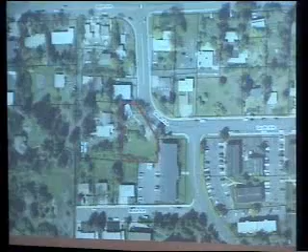So just to refresh your memory, this is the property. It's about 16,500 square feet in size at the intersection of Taylor and Lauder up here in the north portion of the screen, and this is where Lauder heads due south and then makes a due east direction change. This is the property outlined in red at the center of your screen. Within the R4 zone, which is multifamily residential, this was the division that was approved, taking that 16,500 square foot parcel and dividing it into 3 parcels of similar size.

This was the record of survey that was submitted, so we have the 3 properties, and then you have a shared access easement across parcel B, and this is where the single approach was intended to be created, off of parcel B, shared by parcel A and parcel C. This is what the applicant is currently proposing, a reconsideration to allow more of an ingress and an egress approach. I think the concern from the Public Works Department previously when this lot division was approved was under the current zoning code, we allow 1 approach per parcel.

So if we were to not restrict it to 1 approach with this lot division, then you could essentially end up with 3 approaches of similar spacing, grouped together along this Lauder Avenue curve. That was really the concern. With this configuration, you'd be maintaining the 1 approach here in the center, but incorporating an ingress approach further to the north on Lauder. So it would utilize more of an ingress egress where they would enter the property via the northern approach and then exit via the southern approach.

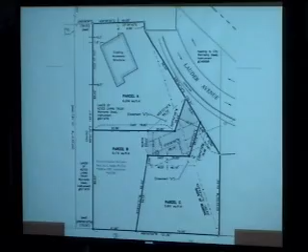Well, I could definitely see the issue of only one vehicular access if that was the only way in and out. But the only reason I'm showing up today is because I thought I was informed by Public Works, again 2 years ago, and I could be totally mistaken, that there was another way in at those parcels. I do know that I guess they are sort of locked in.

I don't remember it. Yeah, I don't remember that either. It would seem like the property owner to the north side of Boyd would have to grant access to parcel C in order for that to be an access.

Yeah, and I drove by there the last couple of days to double check that. Also, I wanted to check out where Deacon Extension is, whether that provides access to the parcel, but it looks like it doesn't because the red-lined area is still quite a ways from where Deacon Extension is. Do you know what I'm talking about by Deacon? Yeah, there's an alley there, here it is.

We have an alley labeled as Deacon Avenue Extension, but it's actually a private drive. There's a few parcels that end up utilizing their access off of that private drive, but they have no rights to it for this parcel here. It would just be for the benefit of this parcel as well as these parcels, and they'd really need to go through a court process to determine who actually has the right to utilize that, since it's a private drive not tied to any one of those properties.

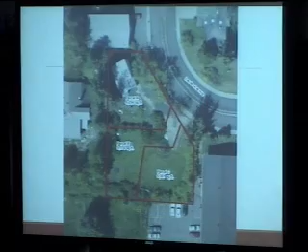Take a look at the overview again, you'll see where that building is, and you can see a tip of where the cars are parked. They pull right in off of... do you know which building I'm talking about? This one? That's exactly it. They have a slight driveway where cars can pull in and perhaps even turn around.

Right now, cars are mostly, or at least 2-3 cars, are parked by pulling in and then having to back out. I noticed in your staff report that the concern is over cars pulling in and then having to back out. So whatever you do, I'd like to point out the safety issues are very real for all of us who live in that area and drive, particularly in wintertime.

Thank you for that. Thank you.

Question for Mike, if I may. Mike, what is the current access for parcel A, the house that's on it? There isn't currently an approach off of Lauder. The current access would probably be from this property here, since it currently, I believe, is in common ownership.

But the intent of the lot division here was to be able to sell off portions of this property and this property here. I believe the current access—this was originally used as an accessory building, Mr. Kais' shop building I believe, and over time he wanted to convert it into a house. Obviously you need a separate access for a house if it's not going to be tied with this main property. So as this evolves and the arrangement has changed to have this be a house, that's what's pretty much necessitating the approach off of Lauder.

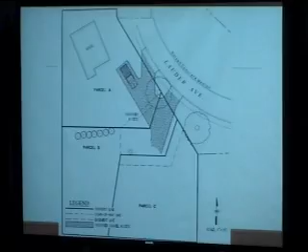We looked at this secondary access for two reasons. One, for safety, so nobody is backing onto the street. The access will most likely be used only for parcel A. That is not what was explained by Mike a moment ago. But there may be an easement developed for ingress and egress, since parcel A was making it very difficult to access that parcel. But like any access that's close together like that, it would most likely be used for a couple.

Mr. Chairman, if we're to the point, I would be in favor of doing it. I would propose that there be an easement that allows all three parcels to utilize both driveways, and that at the owner's expense, do not enter signs be erected on the property side of the north cut, and that a one-way sign be erected at the exit of the south cut. I'm guessing these could end up being rental units turning over every year with new students, and I don't think they're going to hold an orientation meeting explaining how to use the driveways. So to at least give them some hint of what to do when they pull out of there, a one-way sign on the egress and a do not enter sign for the ingress.

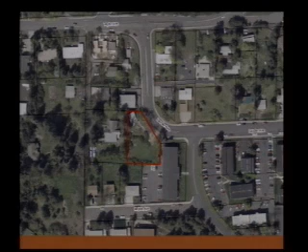The reason for using this curved kind of driveway is that getting into parcel A from the second access to the south would be difficult to turn and get back in. That's why I proposed doing the curved driveway. Like I say, ingress and egress from B and C from the original proposed easement are very easy.

So was Mike not correct when I heard him say that this is proposed as an ingress on the northern and an egress on the southern for all three properties? For parcel A. Just for parcel A? Yeah, I just understood it to be for the benefit of all those parcels. That's not the case? Well, it's not as far as ingress and egress for parcel B and C - getting in and out of those two with the existing one is very easy because you make a turn and you're right in.

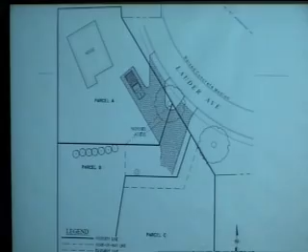I see it. So I would suggest we declare this not quite ready for prime time and ask appropriate staff, the owner, and the engineer to huddle and come back with a coherent request. I just like it to be a little cleaner. We're not against two per se, but we'd like to understand how they're going to be used and how they can be controlled. Since Mike understood it one way and now it's being explained another way, I think it ought to have a little more work before it comes back before the council.

I understand your concern, we have no plans to build a wall. But future owners may have different ideas, right? I understand that, and it just seems to make sense to get back out onto Lauder from the ingress, the northern thing. For someone in parcel A, you'd have to be pretty stupid to attempt that, in my opinion, depending on the way it's constructed, I suppose.

To go out from parcel A, if he has no access to the other one for whatever reason, then he's stuck going out that way. Well, the second one does - there's a current easement, so that could not be blocked.

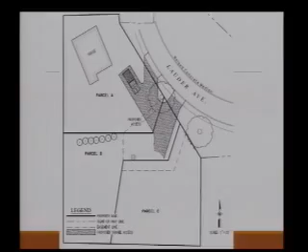Should be able to. This takes it to another problem - I talked to engineering earlier today trying to understand this, and there was some indication that the northern curb cut was going to be constructed such that the ability to use it for egress was going to be precluded. I think we need to figure out what we're doing here. I like the idea of everybody being able to come in the northerly one and go to wherever they're going, then go out the other one, or for A to go out the other one. I don't see too much of a problem with that. But the idea that A, if they don't like people at B and C, can build a wall between there so they can't use that for that purpose anymore, then the whole point of the whole thing is moot.

We need to clean that up in some way, so we're all on the same page. The way he explained it and the way he conceives of the thing is different. So let's clean that up if you wouldn't mind, and we'll probably approve it again. Okay, thank you, thank you.

Okay, so moving on to item number 4 on today's agenda, Rolling Hills 8th Phase 2, green strip waiver request. Bob Bovell, what do you think about this? Let me get this guy going here real quick.

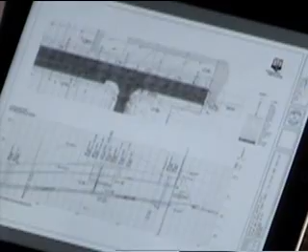So our recommendation would be to construct a bulb in similar to what's shown, but still keep a 5-foot green strip and the parking lot similar to what the collector parking detail is in our current standards. The major difference from that would be that it would be built within an easement, a public access easement, rather than right-of-way as our new standard shows.

Bob, how much is the curb moved in? How many feet? 9 feet, I believe. Okay, engineers agreeing with you, so behind your back, the designer's agreeing. Okay, so it's 9 feet.

So does Mr. Becker's letter have any validity, his comment about... It doesn't say it in his letter, but the parking area, moving the curb in 9 feet, creates a problem with getting parking between the garage and the sidewalk.

And if you keep that 5-foot strip, the sidewalk is... if we keep the 5-foot strip, we're essentially pushing the sidewalk back closer towards where somebody could build the house. This is my understanding, I might have to clarify with community development, but my understanding is that on a collector street, they are legally allowed to have their garage door 20 feet from the right-of-way line.

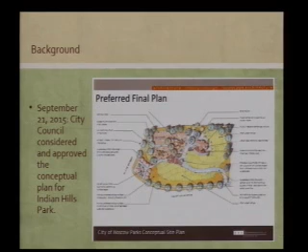Just to refresh everybody's memory, the conceptual plan for Indian Hills Park was approved in September of 2015 by Council. This is really the initial development of the park: the installation of the playgrounds and tile safety surfacing, an accessible route to those playgrounds, turf and irrigation.

Getting back to the playgrounds, the City of Moscow issued a request for proposals with a legal advertisement in the Daily News on May 9th and again on the 16th. We also solicited playground manufacturer suppliers within the Pacific Northwest. I sent it out to 15 of them, and we received 6 responsive proposals.

Once we got the proposals together, we opened up public voting for 2 weeks, beginning May 22nd and ending Friday, June 2nd. We released a press release and mailed 142 postcards within a quarter mile of the park to residents. I also sent emails to the principals of the school district, elementary schools and junior high, and we had sandwich boards on site. Voters could vote online or in person at the HERC where the displays were posted.

The city received 459 votes, a staggering number, primarily through online voting that Jen Piffner, our assistant city supervisor, set up. What were you expecting, 50 or 60? I wouldn't have imagined that many votes. Jen put together a nice online survey that people could vote on, and we got a lot of hits on that. We also had 127 in person at the HERC with old-fashioned paper ballots.

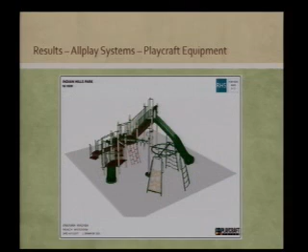The playground for 2 to 5-year-olds.

Back into the RFP, the quotes did have a range of $95,918 to $103,796.45. I do have that asterisk.

The base quote from Allplay Systems was below the listed price in the RFP of $99,500, with a number of $98,796. They did have an alternate in there for the roofs, and I did make the decision in an effort to give the public as many options as possible.

I did put their proposal within the public voting. The public really was voting with roofs on the playground for the posters. So I just would like to note that did bring the total for that playground to $103,796.

So budget for the project: Hamilton funds, which we'll be visiting in an administrative committee, we're looking at $140,000 from that. Bill Park's donation in the amount of $25,000.

And we currently, in our fiscal year 17 capital budget, have $15,000 for turf and irrigation for the park, with a total project budget of $180,000 for the initial development of the park.

Our staff recommendation is to move forward with Allplay Systems along with the action, or provide us with further direction. I'd be happy to take any questions.